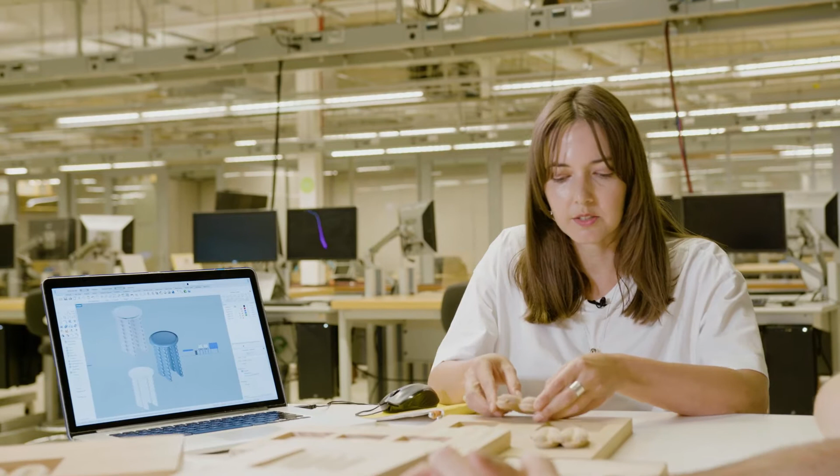Yeah, in my work, I'm really interested in highlighting the material qualities of the piece. And here at mHUB, I'm able to rapidly prototype through various different materials with different machines, think about how I can really exploit the machines and push their limitations. Going across scales really helps me understand the form-finding language for the work that I'm developing here.

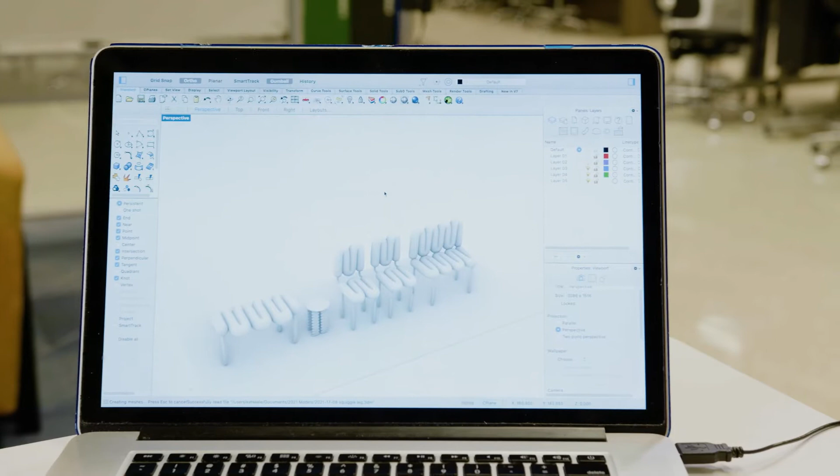You can see in the rendering that this is being translated to several different products that you will see later being developed across the scale of something small to a larger piece. Yeah, and this would build, so just so everyone knows what we're looking at, this is just one part of a structure that would become the leg of a table or the back and seat of a bench.

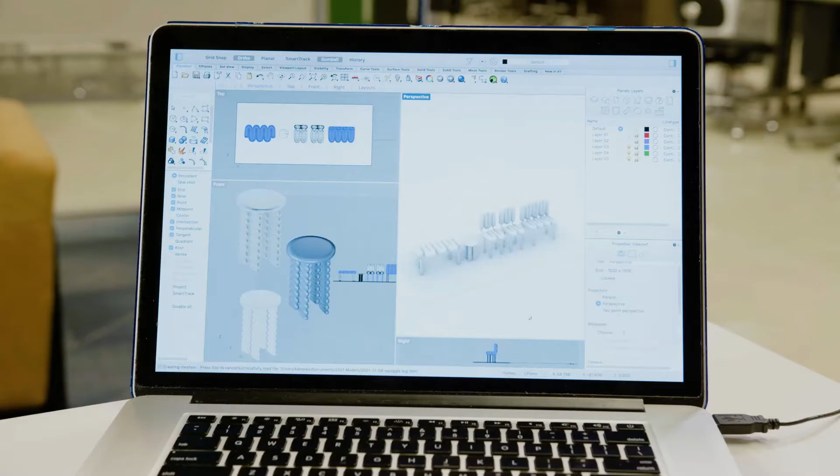So Quinn, prototyping in general, what's the quick take? So, always start as simple as you can, with the cheapest material you can, because most likely you're going to run through several different iterations of the shape and the form. You don't want to start with the really expensive stuff first, because you're still fleshing it out, bringing it out from your head and onto a computer or into real life. So in this particular instance, started with some MDF, moved on to some poplar, a little bit of oak, a little bamboo, until the final form was figured out.

And now that generalized shape has been tweaked enough that we want to see what it's like in real life, we're actually going to do it out of a large block of EPS foam, just because it's super cheap. You don't want to buy a big block of oak and machine it away and waste that wood. Foam is very easy to machine, very quick. You don't want to spend a lot of time and a lot of resources until you know it's actually what you want to make. So the foam stage will be like looking at it to scale.

To scale. Blowing up something like this, which was done on the Roland CNC, which we're going to show you as the starting process. And with this perfected, moving to the bigger version of that. So within the first week or so of joining, you were on one of our CNCs, the Roland, which we're going to show you, which has a very nice, simple interface. You simply drop in an STL, and you go through some steps it walks you through, and you're able to start making some stuff.

The next step after that, for full scale, part of it is the machine limitation on size. So we're going to move to the ShopBot, where we'll machine this with much larger tools, a little more, not necessarily accurately, just more, bigger, and more chips. So that would be the process after that.

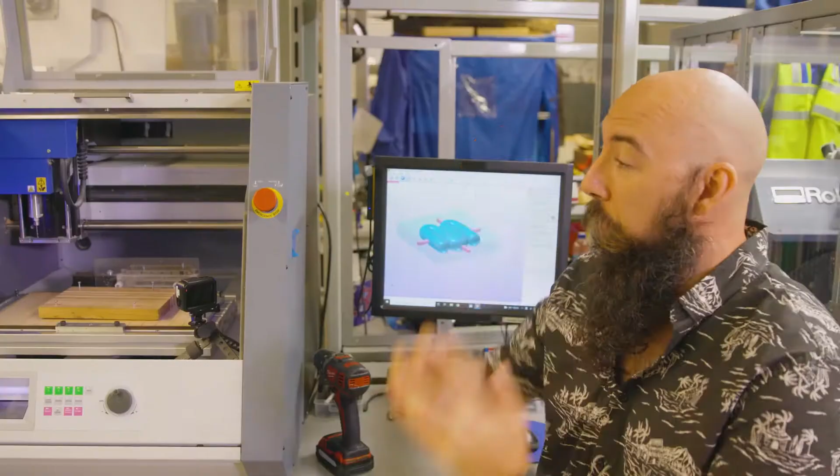So we are here at the Roland MDX50. This is the machine that I was mentioning. It's a little simpler to use. We're going to use a cam system that comes with the machine. You can use more complex cam systems if you want, but just to show how simple it is, it's called SRP Player. It is quite literally 5 steps.

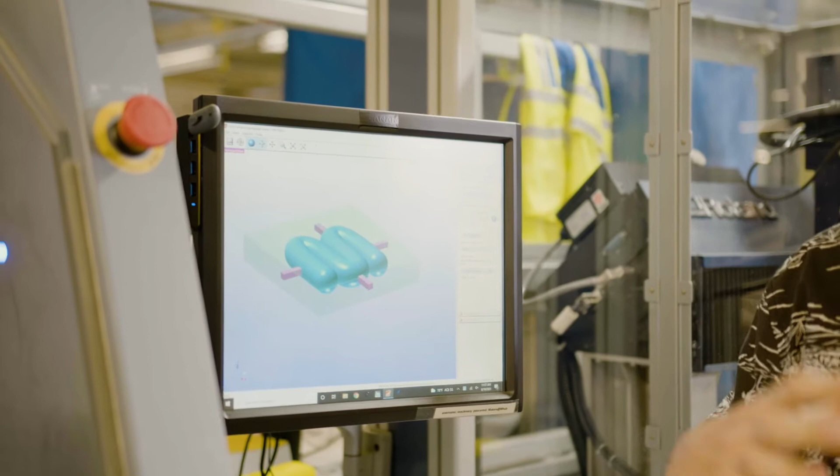The very first thing you're going to do is upload your model and say how big it is, make sure everything is to the proper scale. Next step is going to be just the type of milling. Are you flipping your piece?

There are 4th axis attachments to this kind of stuff. You're going to create the toolpath where you're going to say, what type of material is it? Is it wood, plastics, etc.?

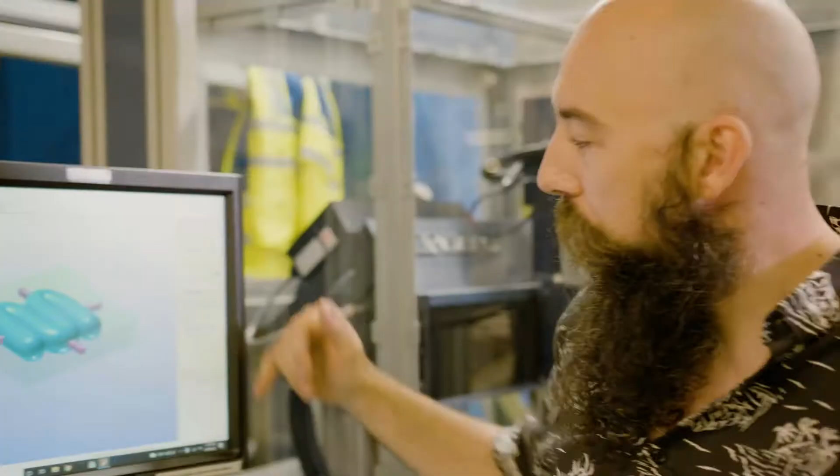The benefit of this kind of system that was built in conjunction with the machine is that all of the stepovers, feeds and speeds are built in. So it takes a layer of complexity out of the machining process that's sometimes a little harder for newer people to the system or process to learn. Then you're going to select what kind of roughing, what kind of finishing, but it gives you a lot of those feeds and speeds for you.

You can get a preview result if you want to sit there and let it process, but it'll also give you an estimated cutting time. In this particular case, it's 1.6 hours. Once all of that has been set and the preview looks good, we've already set everything up. You can just start cutting and it gives you the tools that you've selected, all that kind of stuff.

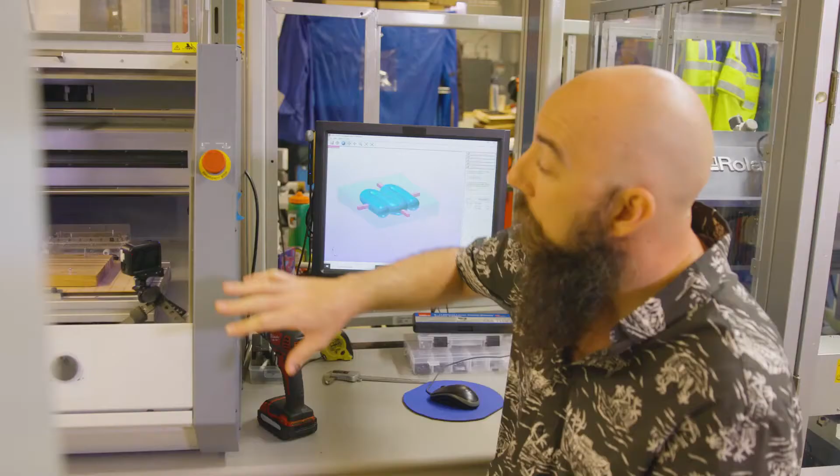The machine has already been set up, so we've already put the tools in at the right required places, set our work offsets on the machine. Again, super simple with this guy. And all I need to do now is hit start cutting, so let's see some chips.

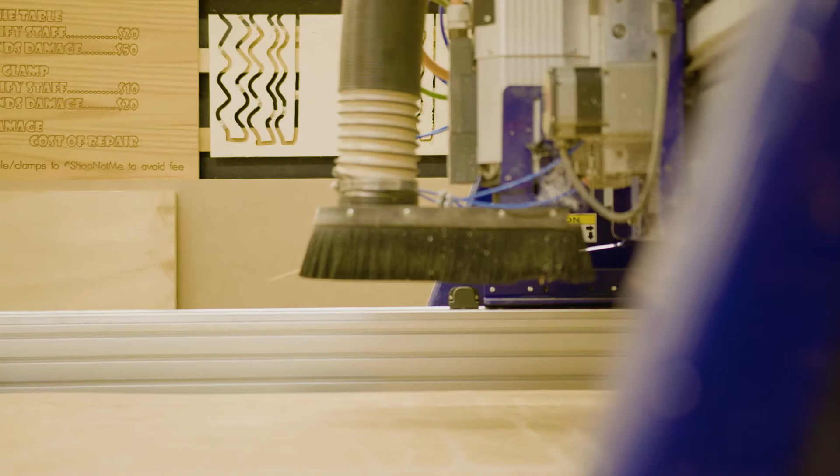All right, we are now in the wood shop. So we're going to be machining that 2-inch EPS foam. Again, we're using EPS foam because during the iteration process, you want to do it fast and quick and cheap. Using that final material the first time, there's always something that needs to be tweaked, and it's better to find that out when it's something less expensive, rather than a large, heavy piece of oak or aluminum or whatever it might be.

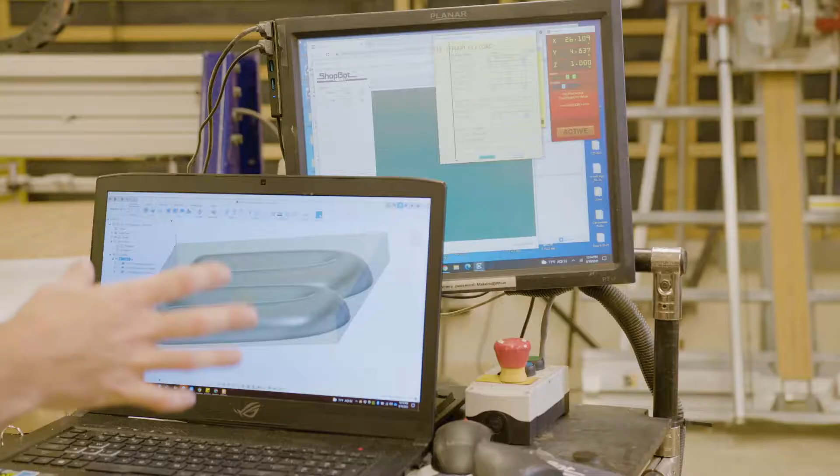Because this machine is a little bit more complex in its user interface, we programmed everything with Fusion 360 for this portion. There is another program, VCarve Pro, which can do something right in the middle between the SRP player and Fusion. But because this is an organic form, I wanted a little bit more finite control over exactly what the tool path would look like, any tooling marks. We know that Kat likes to see some of those, so we helped incorporate a little bit of that.

The program's already done. It's simply going to use 3 tools, and everything's already been set up. We've set our work coordinate system, we've measured all our tools, the spindle's been warmed up.

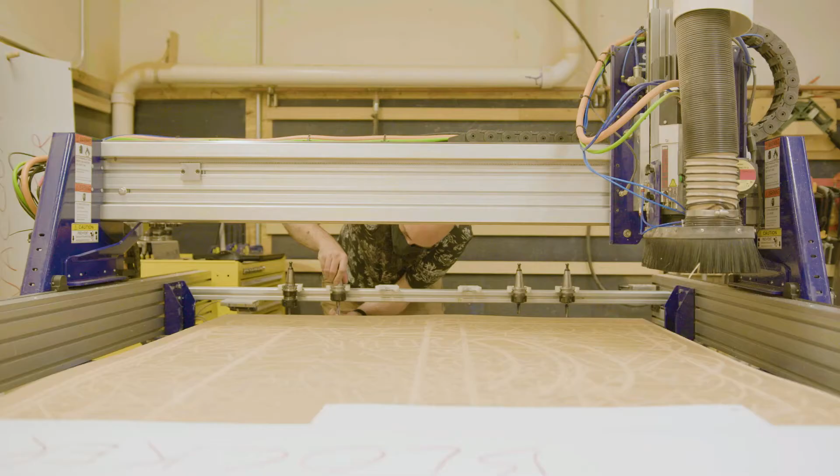Okay, so we have a finished form at scale, at least for a couple pieces that might be in your series of furniture, like a bench or a chair. Let's test how the scale works out.

Yeah, so this would be the back piece, and you can kind of see how this is going to hit against your back. Yeah, the grooves feel really nice. And ergonomically, thinking about also how your legs are going to fit and really kick in.

And this is just the top side, so this will be a mirrored form. Right, so it would be rounded on both sides. Yeah, you would do a similar process where you flip the material or affix 2 pieces. Exactly. So really thinking about the angle of the backrest. Is the size kind of what you were expecting? Oh yeah, this is almost exactly to scale.

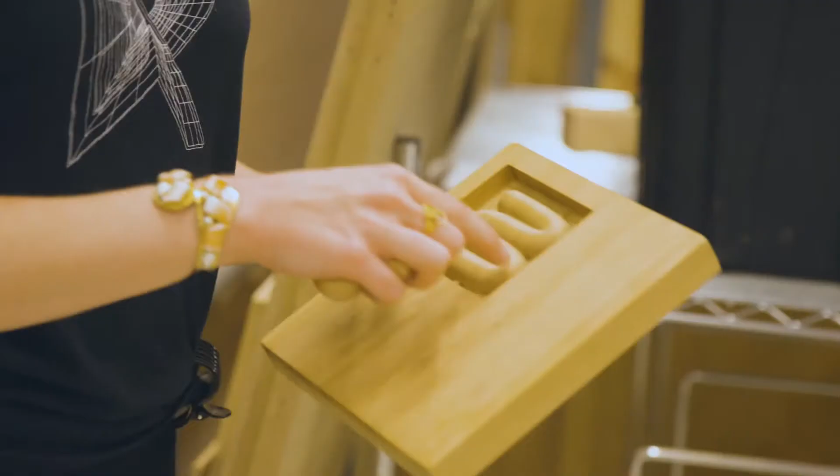Perfect. And then let's pull these in here because this is using the same form but a different scale and different size, which if we think back to the models that you were showing on your computer, would be like the leg of a stool. Right, so this would be extruded in aluminum, thinking of that as the stool leg, and then even possibly the development of a smaller stool that's the full form. So you can see that through this process, an entire collection has emerged with this form.

Yeah, it's super neat. All right, Kat, well, super neat to see what it would look like at scale. Let's join Quinn back at the table and talk about, okay, at this phase of prototyping, where are you going next? What's the next area that you're going to explore? Sounds good. All right, see you there.